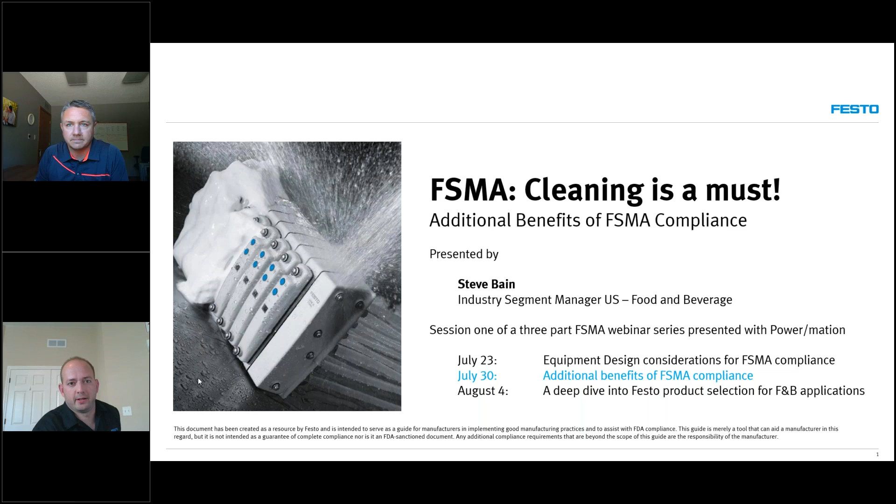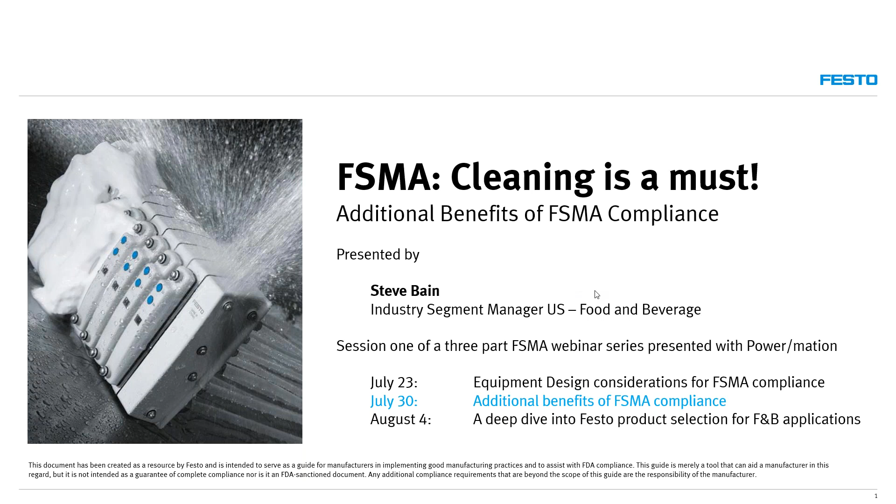All right, thanks a lot. I'll jump right into it. So this is part 2 of a 3-part series on FSMA. Last week we reviewed what FSMA is and what it means for equipment design. We'll review that very briefly, and then we'll talk about what additional benefits can come from compliance.

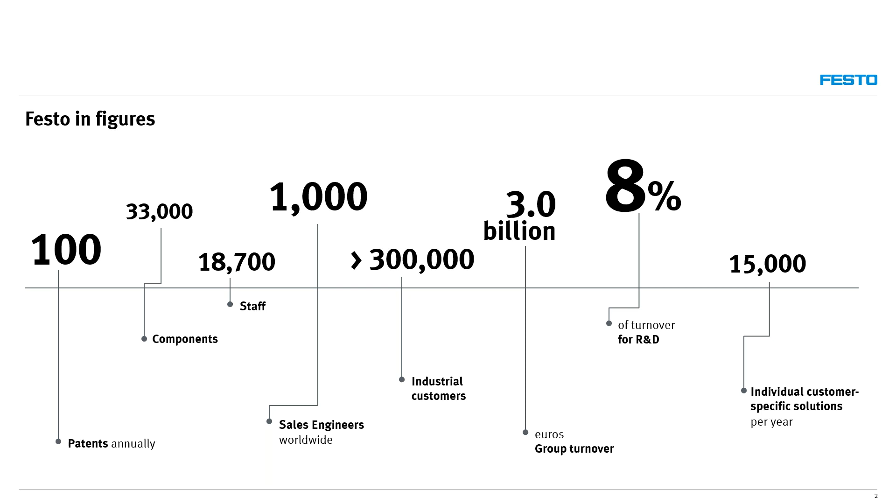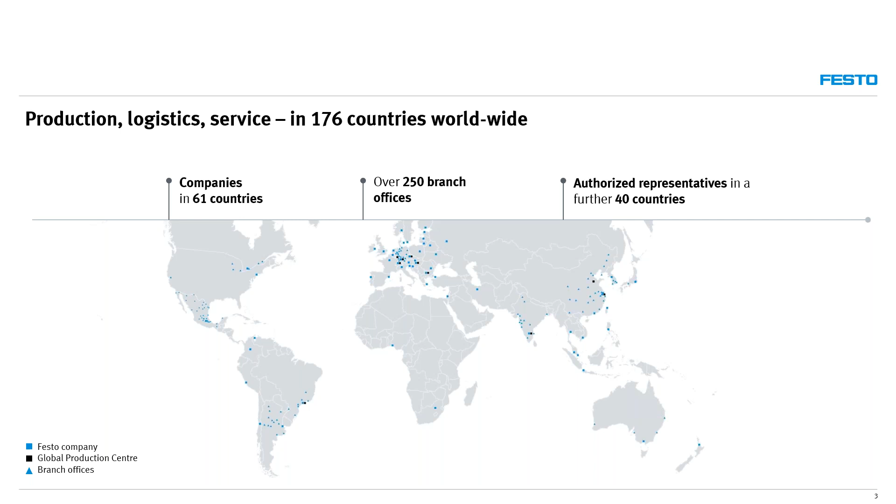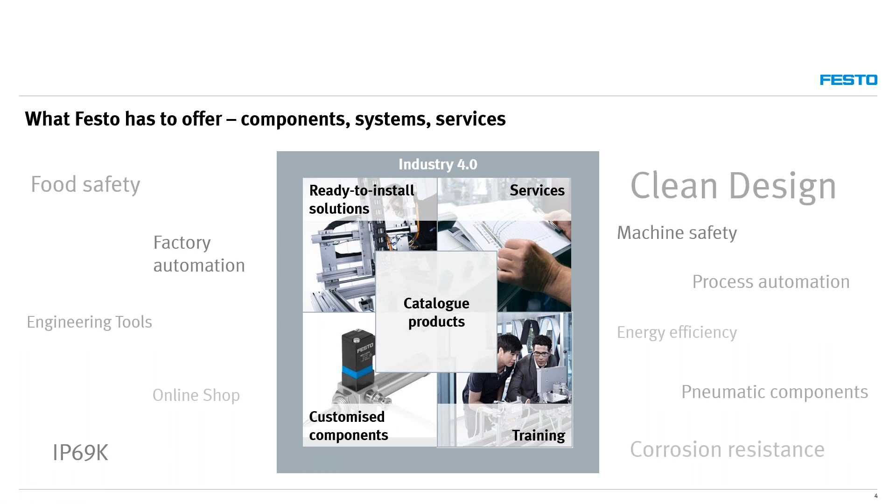So a real quick overview of Festo: we are a 3 billion euro company headquartered in Europe, in Germany. We are also the world's largest supplier of pneumatics for the food and beverage industry, so we see a lot of applications and work with a lot of customers. We've really become an expert in this field of helping steer customers towards better compliance and better equipment design. You probably know Festo for our catalog products, but we also do a lot of customizations. We're the world's largest industrial training company, and we can do services like energy audits or equipment audits. As I mentioned, we also do a lot of customized components, which is especially important for the food industry, where there are so many different applications and custom needs for different equipment.

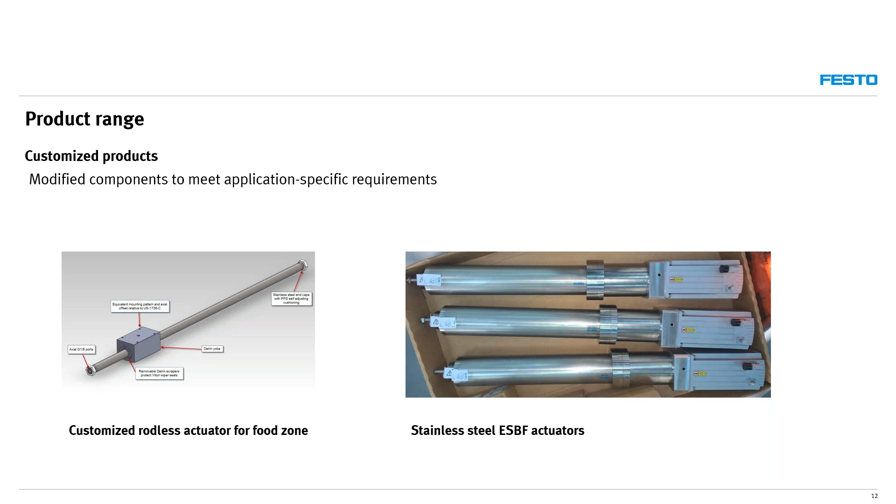So as I mentioned, we'll do a real quick review of what FSMA is. FSMA is the Food Safety Modernization Act. It was signed into law in 2011, and it was the first major overhaul of good manufacturing practices, or GMPs, in 25 years at the time. During that time, the supply chain changed a lot, automation changed a lot, and so there was a huge need for a big change in how we look at the food supply chain.

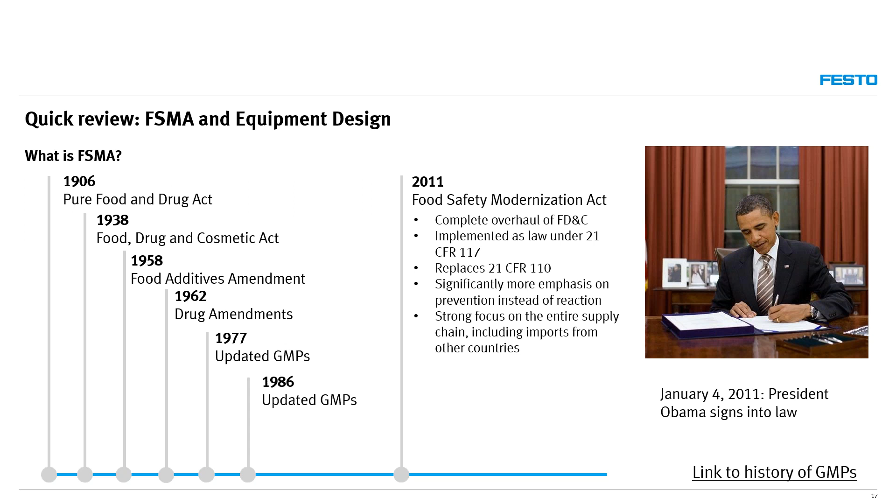The major themes for FSMA were import safety. We're importing about 15% of our food, and how do you know that the facility that food is being produced in is as clean as it is in the US? Well, now FSMA has to be, and a big part of that is being able to rely on third-party certification companies that can go in, certify that it meets the requirements, and now importers can rely on that. We're seeing that heavily starting to roll out through the actual supply chain, where major grocery store chains are only allowing product on their shelves that is from a facility that is certified.

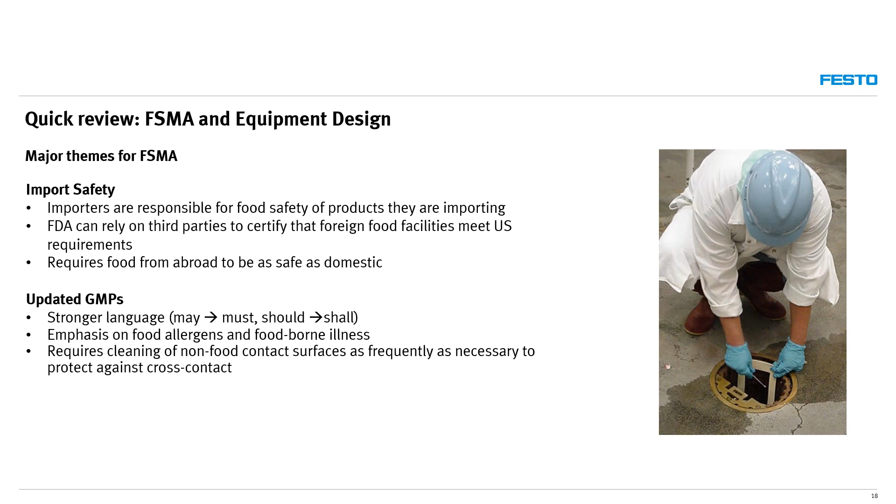Another major update was updating the GMPs. So stronger language, should into shall, so it seems less optional. And then additional language about cross-contact and food allergens. Those weren't part of the CGMPs before because there really wasn't a focus.

FSMA went from reaction to prevention. And one of the big changes too is this hazard analysis and risk-based preventative controls, HARPC. So every plant has to evaluate their hazards, identify and implement preventative controls, monitor those controls, and then maintain records and conduct verification activities to ensure those controls are in place. And this is a big deal for factories to have to implement this process.

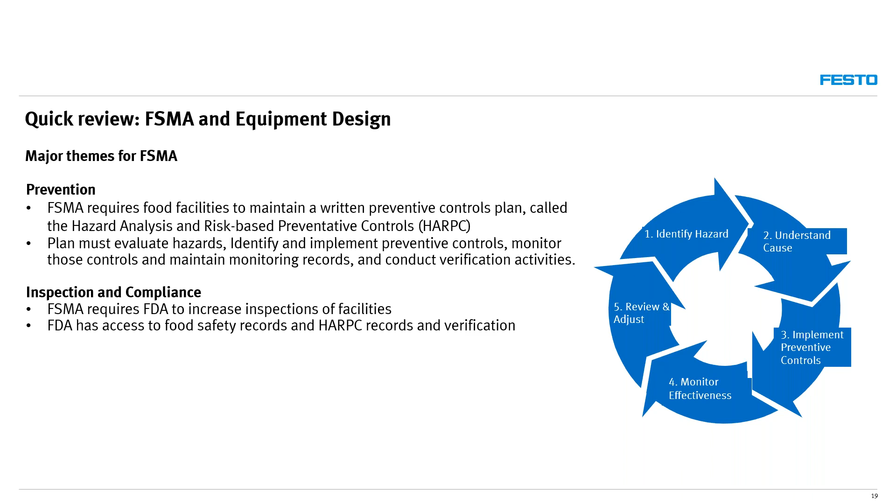And on top of that, the FDA can now have mandatory inspections of facilities, and the FDA will have access to all those records that you're supposed to be keeping about your HARPC verification activities. So this documentation and this prevention aspect of FSMA is really quite powerful.

With that too, the FDA can now enforce mandatory recalls, and they can do that when there is a reasonable probability that the food is adulterated. And they define adulteration as where food has been prepared, packed, or held under unsanitary conditions, where it may have become contaminated with filth, or it may have been rendered injurious to health. And so that language really opens up the possibility that a mandatory recall could be enforced just due to unsanitary conditions of the factory, even if the food isn't contaminated.

And then on top of all that, there's something called the Park doctrine, where executives of companies can be held accountable for food safety issues, even if they weren't aware that the specific offense was even happening. So ignorance isn't even an excuse within a food company.

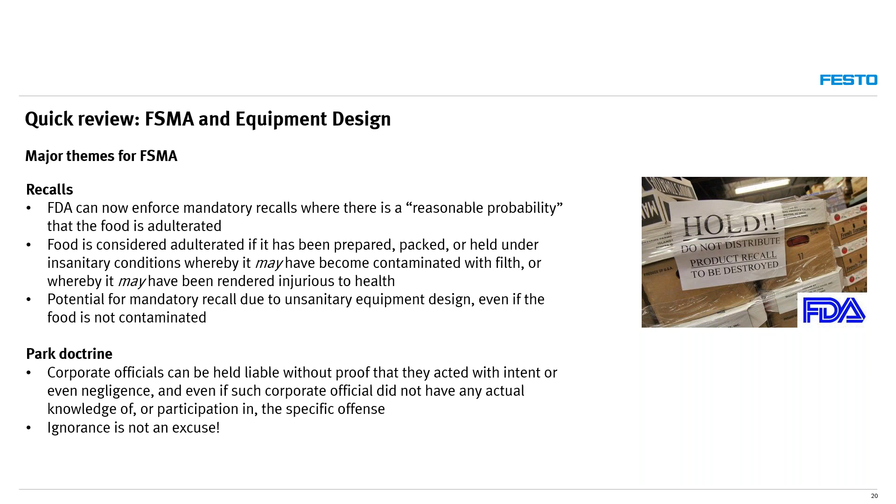So we did a deep dive into Title 21, Part 117, which is where the majority of FSMA lies. And the 117.40 specifically is equipment and utensils. And we did a real deep dive into each one of these laws. We're not going to go through them today. If you want to learn about this, we'll be hosting the previous webinar on the Festo web blog, so you can watch that video.

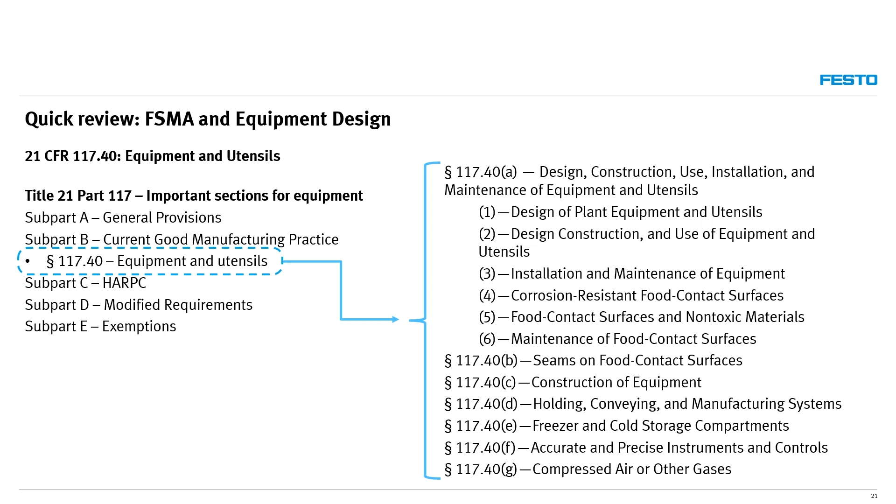But the main takeaways were that machinery needs to be designed to be cleanable. It's not just enough to actually clean it. The machinery itself has to have that design principle built into it. Food contact surfaces cannot have cracks or crevices or introduce contaminants. Machinery needs to be capable of withstanding cleaning processes. Even machinery that does not contact food needs to be capable of being cleaned. And at a minimum, a 0.1 micron filter at point of use should be utilized for compressed air with direct food contact.

From that, we had just kind of broad strokes, from a Festo perspective, what are some things you can do? One is to use components with reduced cracks and crevices. Use components with FDA-approved polymers for seals. Use components with NSF-H1 grease, especially over the food zone. And then standardize on M threads and G threads, which are parallel threads, so to eliminate that crack and crevice created by a tapered thread.

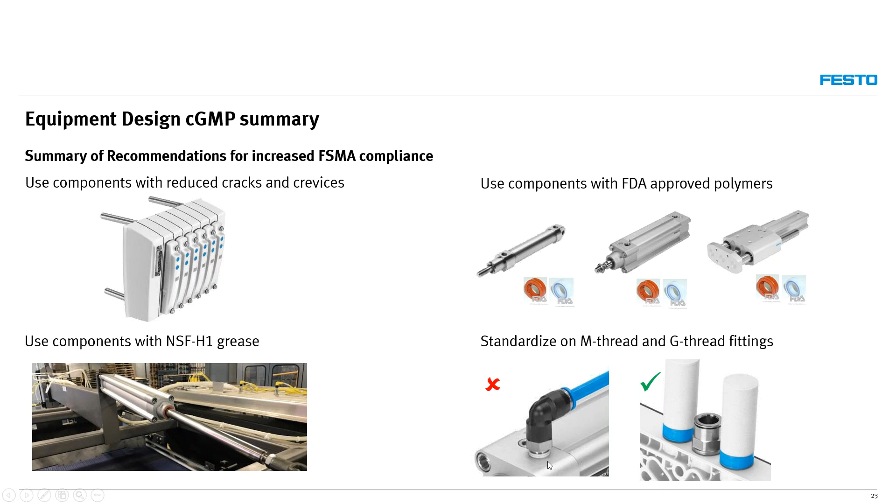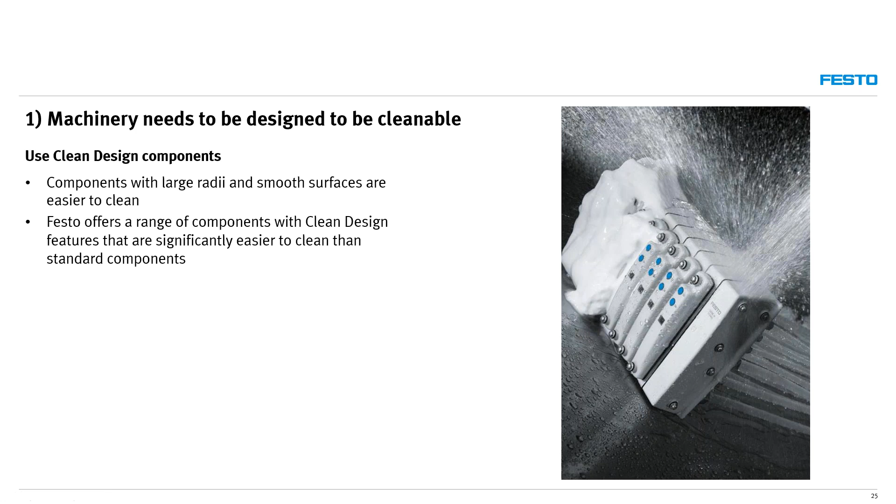But what additional benefits can come from that? So as an example, we said to use clean design components. These components have large radii, smooth surfaces, easy to clean, yes, and being compliant, but a huge additional benefit here is that if you can clean your machine better and faster, in theory, you can reduce the amount of time that you're cleaning significantly. And if you have better cleanability, that means faster cleaning, which means you can run your machine more, which means your OEE, or your overall equipment effectiveness, can increase because your machine has higher availability. This is probably one of the biggest benefits of focusing on cleanability from a profitability standpoint. If you can cut your cleaning time down, your machine operation time can go up.

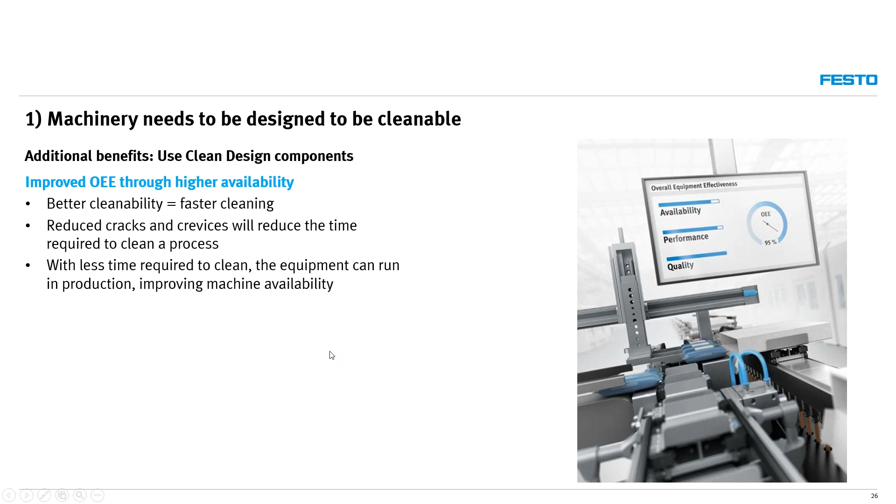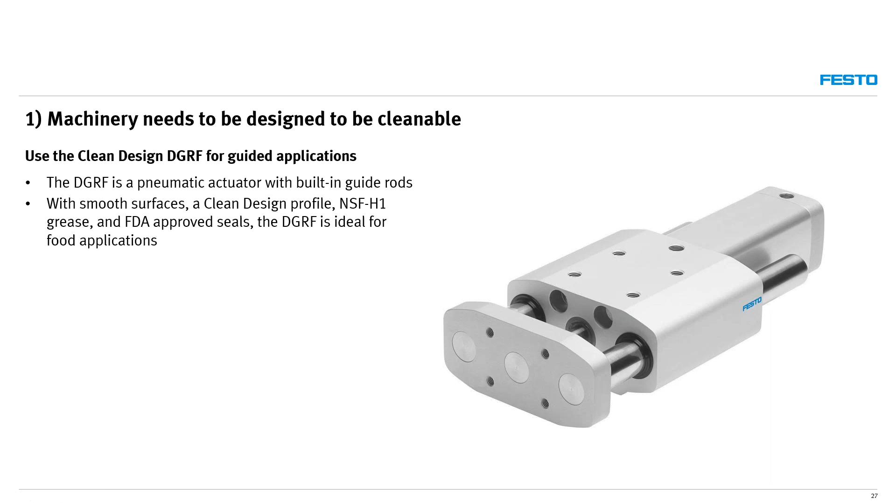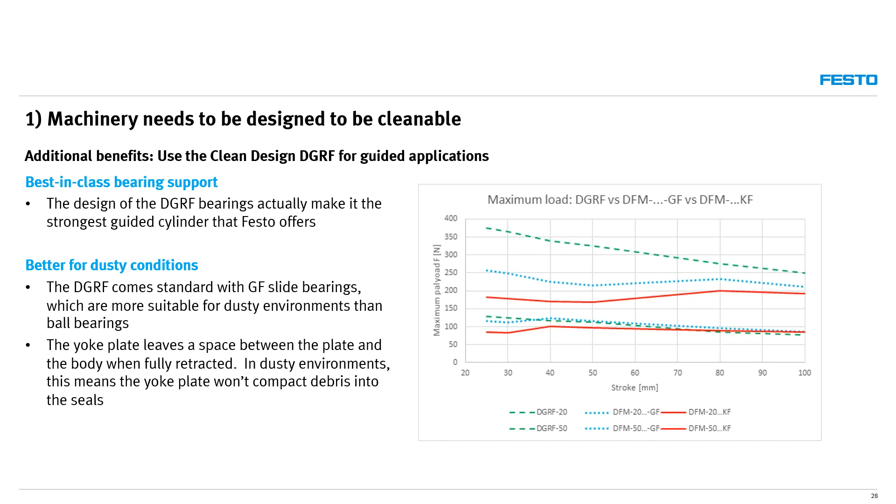Another example might be using the Clean Design DGRF. So this is one of our Clean Design actuators, food safe grease, food safe seals, but it's also the strongest Festo actuator for a guided cylinder, extreme bearing strength, just due to the design. So if you're looking at even a non-wash down application, but looking for strong bearing support, it's a great actuator for that. It's also one of the better actuators we have for dusty conditions. So it comes with slide bearings, which are better than ball bearings for dusty environments. But then an interesting aspect too is that the yoke plate, when it closes all the way down, leaves a space between the plate and the body. And so if there is a lot of dust or debris, it won't compact that into the seals and cause a premature failure.

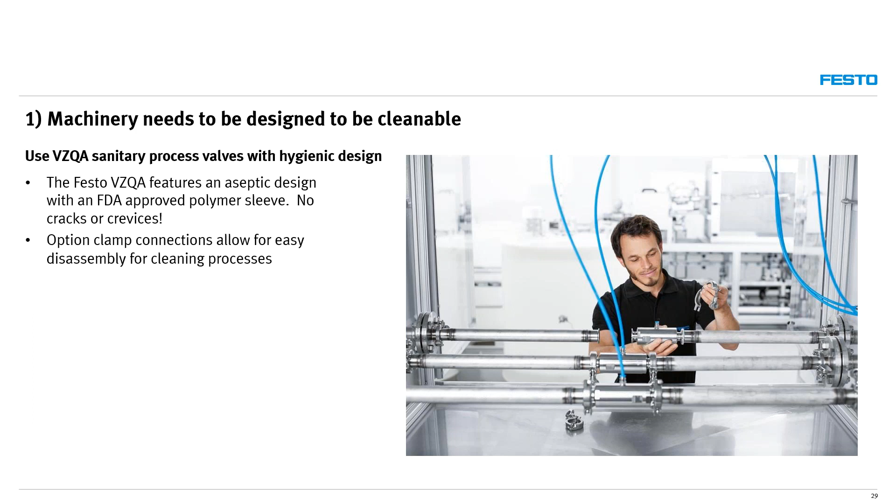Another product we talked about was the VZQA pinch valve. This is an aseptic design with clamp connections so you can easily disassemble it to clean your equipment. Some other benefits are that it's very small, not much bigger than the pipe itself, so you can fit a lot of valves into a very tight space, which might create some opportunities.

Another interesting thing is that it uses a lot less energy than a comparable ball valve or butterfly valve with a quarter turn actuator. I did a quick comparison: a half-inch ball valve consumes about 0.6 liters of air per cycle, while a VZQA is less than 0.1 - so a much smaller footprint.

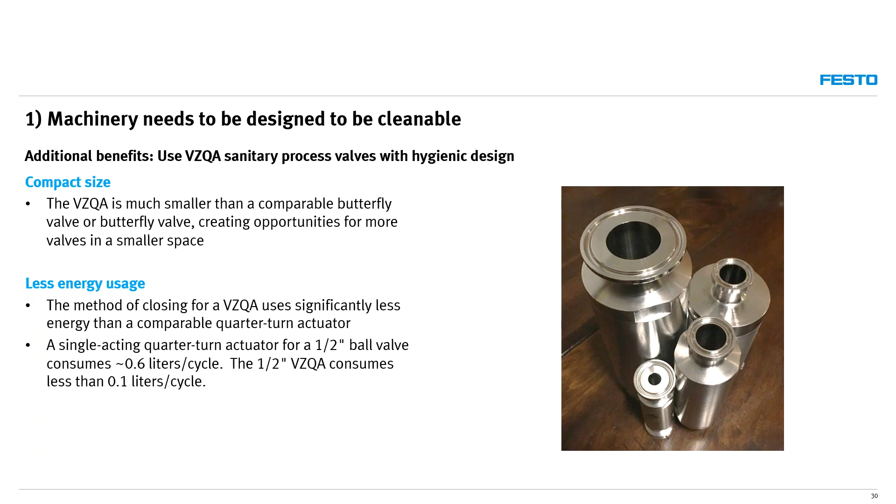Next, food contact surfaces cannot have cracks or crevices or introduce contaminants. We already talked about threads, about how a G thread is more sanitary than a tapered thread. A tapered thread, when you screw it in, also galls the threads, so you could create metal fragments during that process - another potential contaminant. Then you have the sealing tape, which is another potential contaminant. So tapered thread is not very good for food safety.

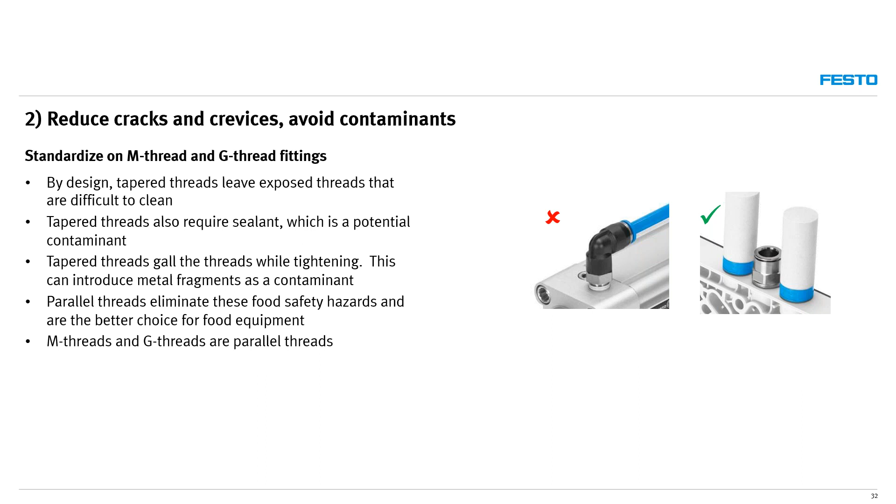But if you go to G thread, there are a lot of benefits. One is that you can screw in and screw out a G thread many times without wearing down the threads or having issues, while a tapered thread can only do this maybe 3 or 4 times. So if you have to replace an actuator, maybe now you don't also have to replace a fitting - that's a big benefit.

Energy savings too. Tapered threads are very difficult to get a bubble tight seal. When you screw in a tapered thread, you end up creating a small air channel that spirals up through the threads, so unless your sealing is perfect, you're going to have a leak. With a parallel thread, you eliminate that because everything gets sealed properly with the shoulder seal.

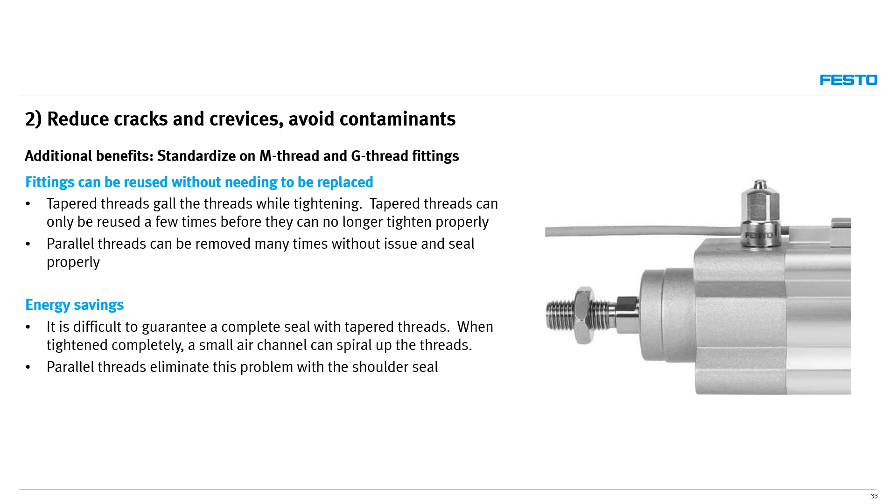Also, from an engineering perspective, when you have a tapered thread and you're screwing it in, the height of that thread is really kind of uncertain. So if you're looking at a tight tolerance application, it's hard for the engineer to verify whether this is going to fit or not. Where with a G thread, you know exactly how deep that's going to be, and you can verify it's going to fit.

And then last, with a tapered thread, it's pretty easy to over torque or under torque - it's hard to get that torque range right. With a parallel thread, it's very hard to over torque. So from an installation standpoint, again, parallel threads are a better option.

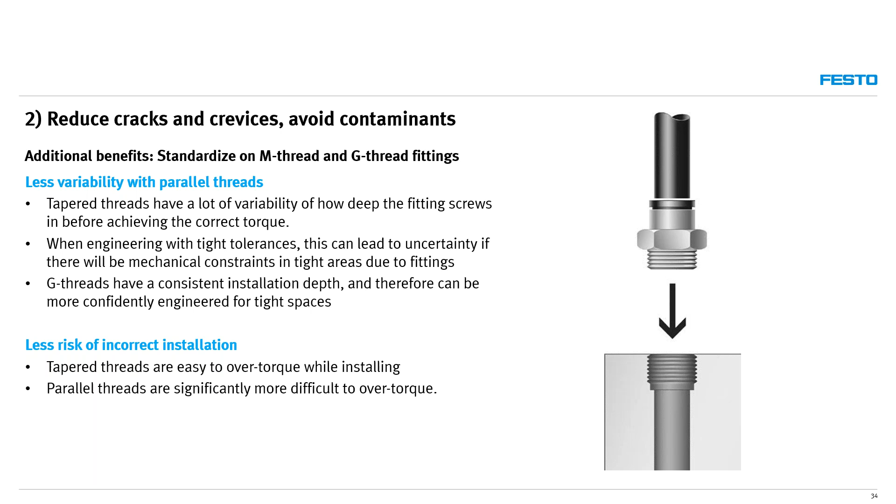Also recommend the use of NSF grease, especially over the food zone. A lot of pneumatic and electromechanical components come with factory installed grease. Where possible in food, that should probably be NSF H1.

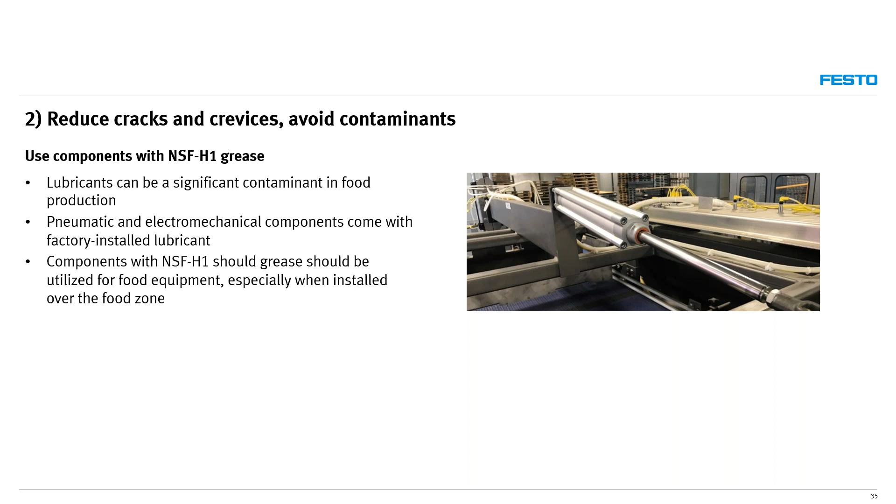But what benefits would standardizing on that bring? Well, the first thing is good news: you don't get negative aspects to that. Thorough testing from Festo - we have what we call our torture lab, where we put all of our actuators and valves through rigorous tests, and NSF grease does not hurt our performance. So if you're using components with NSF grease, you're going to get the same or better performance as a standard Festo cylinder.

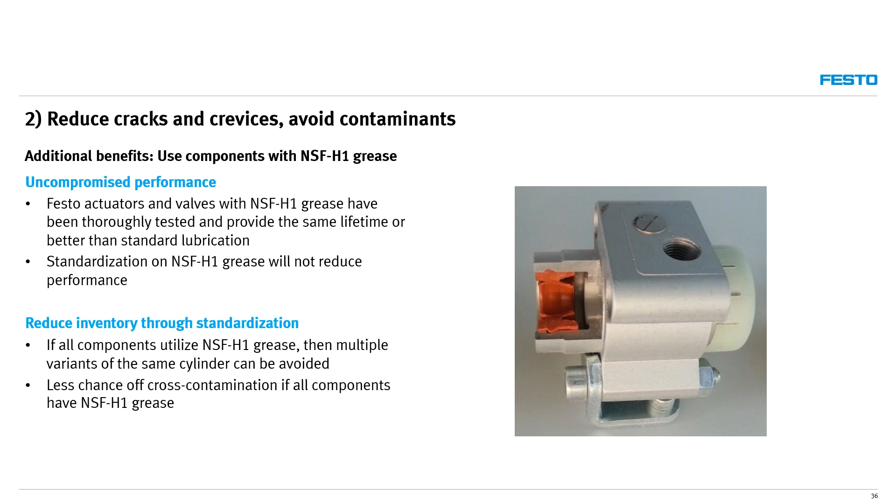It also helps reduce your inventory. Instead of having one cylinder with NSF grease because it's over the food zone, and another one that isn't, you can consolidate your inventory into a single cylinder. And you have less risk of someone accidentally choosing the wrong cylinder and putting it over the food zone. So if you're going to standardize it, there's not a lot of downside to that.

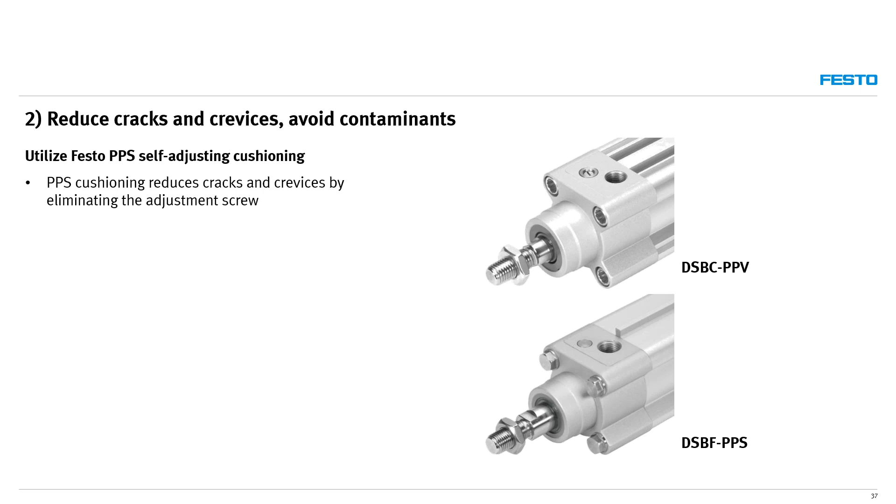We talked about how using Festo self-adjusting cushioning, which is PPS, eliminates the adjustment screw for adjusting the air cushion.

There's a lot of additional benefits that PPS has, though. A big one is that PPS cushioning adapts to changing conditions. If you have a PPV adjustable cushion, you set it for a given application - the proper cushioning for that air pressure, flow control, pushing a certain load with a given amount of humidity in the air and friction on the rod. You might optimize it, but over months or years those wear characteristics change, and PPS cushioning adapts to that. Your cushioning will be good now and in the future. That's a huge benefit.

And you get that benefit at a reduced cost because there's less mechanical parts. Our cost for that part is reduced by about 1 or 2%. So you can buy these cylinders for less expensive than adjustable cushioning.

Another big benefit is faster installation. Instead of having to install a cylinder, go to the manual overrides on the valve, toggle it, see how it reacts, go adjust the cushioning, go back and forth - you completely eliminate that step. Whether you're installing a machine for the first time and have to set cushioning on 20 cylinders, or you're an end user replacing a cylinder between production runs, in either case you're eliminating a lot of time, potentially not even needing 2 people to do that process - that could be a really big deal.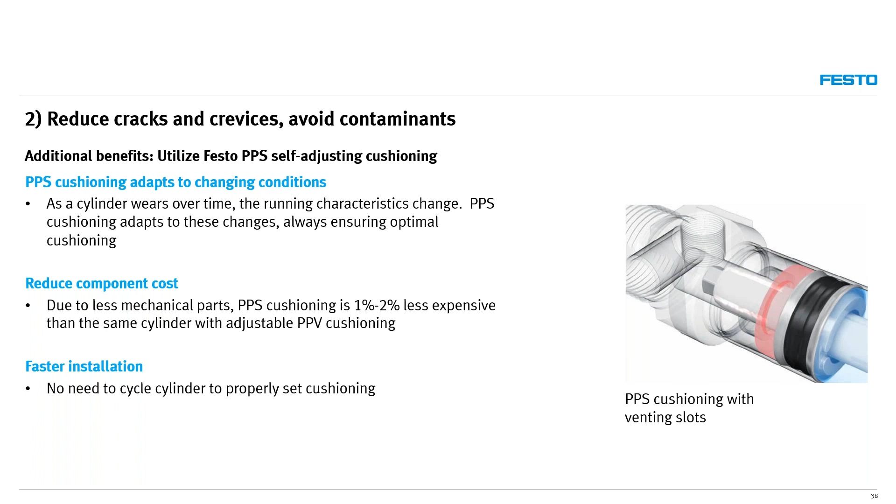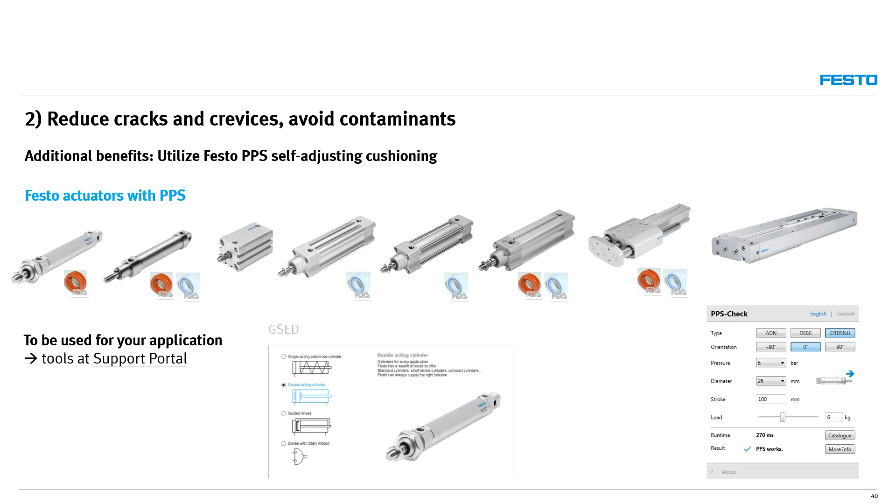Next, this is the slide showing all of the different Festo cylinders with PPS actuators, and also highlighted which ones have those FDA approved seals.

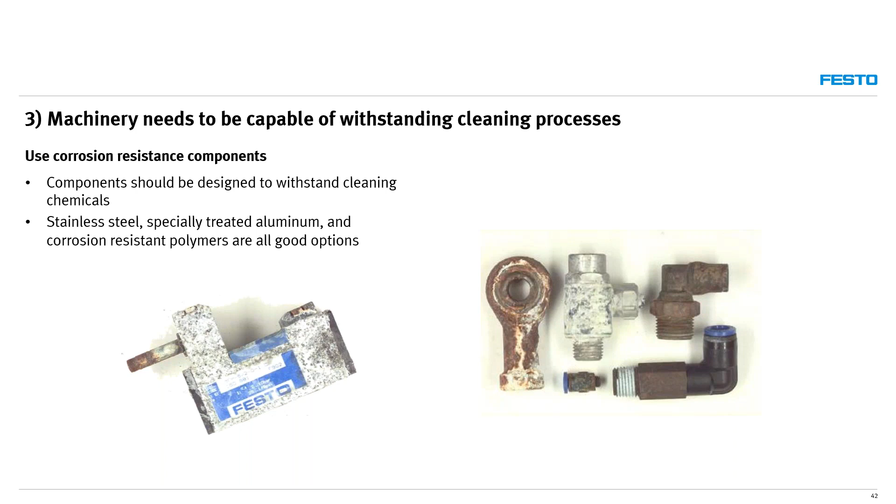So the third key idea was that machinery needs to be capable of withstanding cleaning processes. The recommendation is to use corrosion resistant components where you can. That seems obvious in food, but even in non-food applications, things get oxidized over time - general rust happens. Corrosion resistant components will give you longer life in general. Most, I think all, of our corrosion resistant components also incorporate NSF-H1 grease and FDA approved seals, so there's built-in compliance. Using corrosion resistant components tends to get you more into the food spectrum of components, meaning you're probably more compliant - you should always double check that, but it's a good way to go.

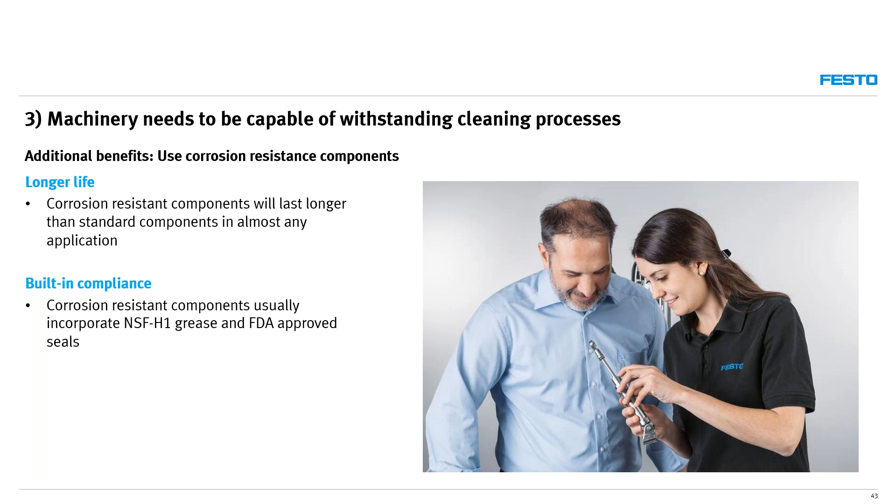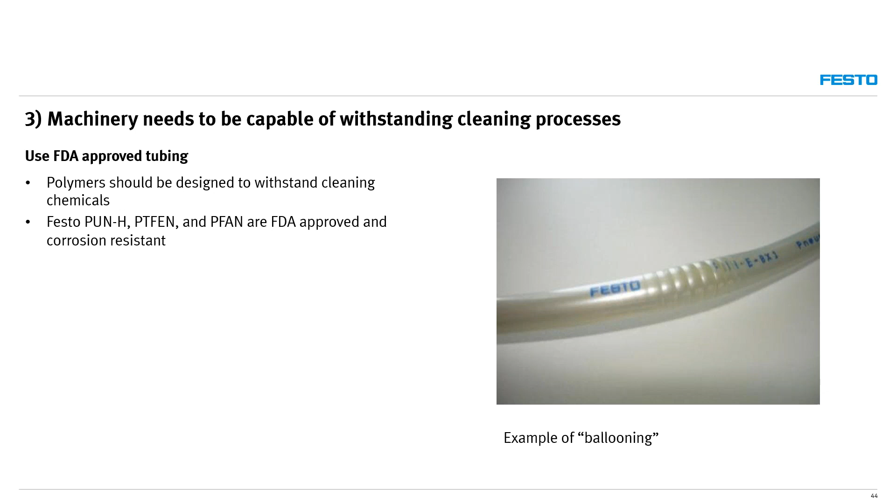Another recommendation was to use FDA approved tubing. If tubing is FDA approved, it means the polymer it's made with falls under the generally recognized as safe list from the government. There are all these polymers, and the polymers used for these are FDA approved. We have 3 tubes that are FDA approved at Festo: one is PUN-H, one is PTFE-N, and the other is PFA-N.

So what additional benefits come with using those tubings? Well, all 3 of them are also hydrolysis resistant, so even if it's not a food environment, they won't deteriorate due to wet or humid environments where water can interact with the tubing material and break it down. PTFE-N and PUN-H, if the PUN-H is black or blue, also has high UV resistance, so you can use these in outdoor applications.

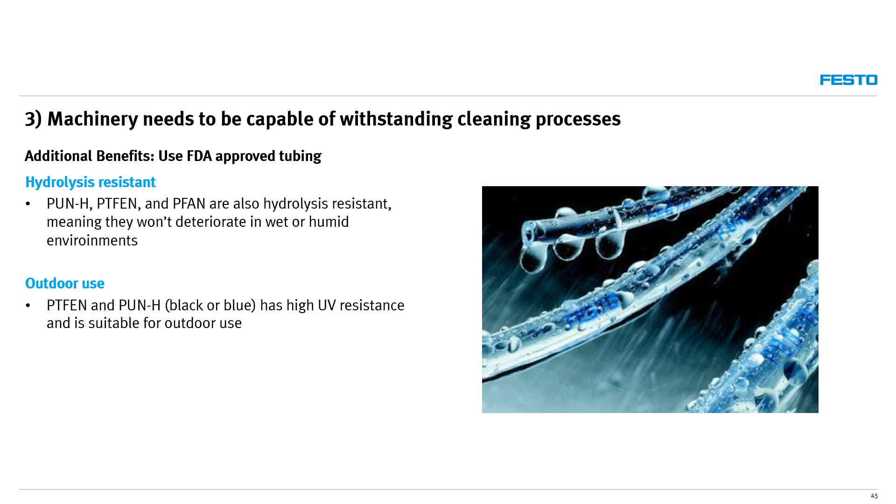PUN-H itself is a great all-around tubing - very flexible, low cost. It's my go-to if I'm going to look at a new application.

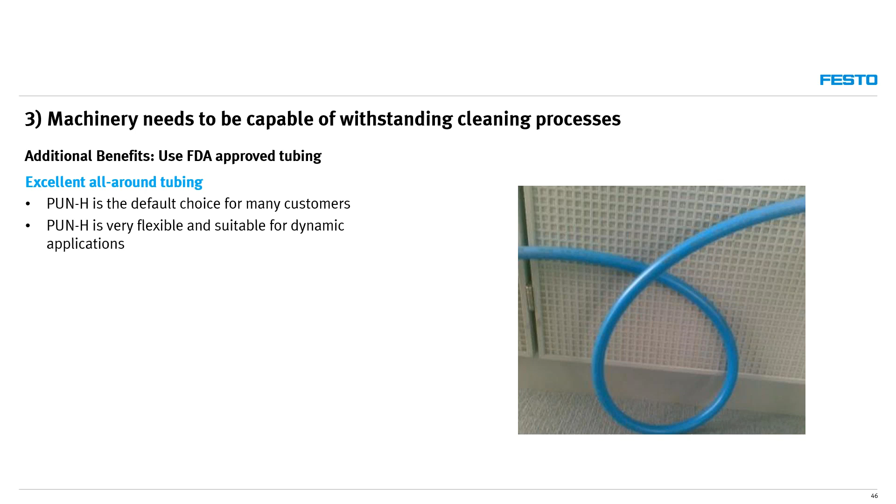PTFE-N and PFA-N are both good for high pressure and high temperature. Maybe you're putting something next to an oven and you're not sure what that heat radiation looks like - this kind of takes away that risk. And if you're in an application looking for EC 1935/2004 certification, which is a growing requirement in Europe for food applications, our PFA-N tubing is 1935/2004 certified. So we can fulfill that need if it's required.

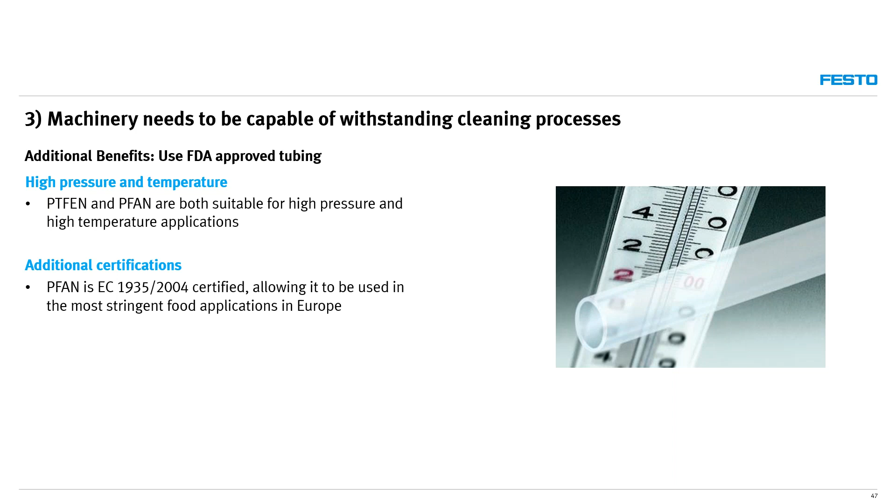Another recommendation for withstanding cleaning processes is just higher IP ratings. The Festo MPA-C is IP69K rated, meaning it can withstand high pressure washdown. It does that through 2 really cool design features. One is the seals themselves - when assembled, if you were to spray it with high pressure, it actually helps enforce the seal even more. So the design of the seal helps make it even better in high pressure washdown situations.

And then we also have a redundant seal. Your outer seal is the one that reacts to the pressure. The inner seal also helps protect the electronics. So even if that outer seal was to get breached, the inner seal is still going to protect the electronics. To my knowledge, we haven't had a field failure yet of this product, so that's a really good, awesome product from a washdown perspective.

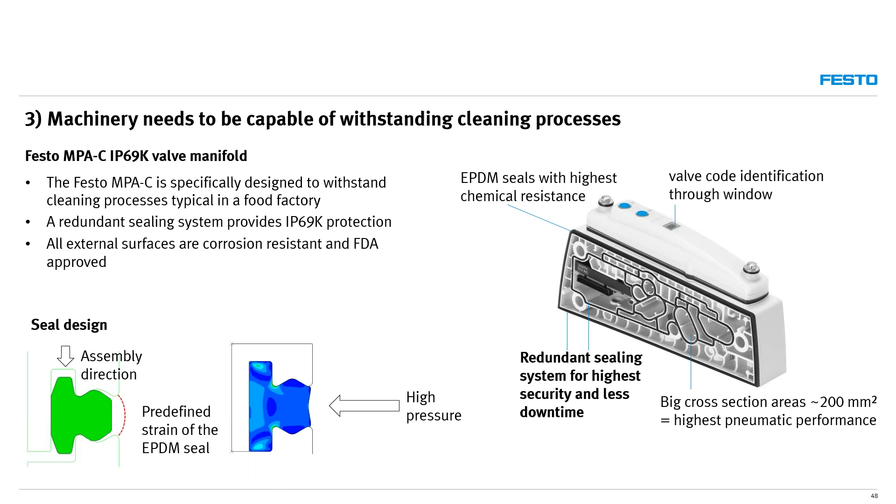But what are some other benefits that come with this? First is that your control cabinet size could go down or be completely eliminated. In the example shown here, this is a brewery - they wanted a valve manifold in the cabinet, nothing else. The MPA-C compared to a valve manifold in the cabinet was less than half the cost. So this was a great cost saving in addition to also being very well suited for this environment.

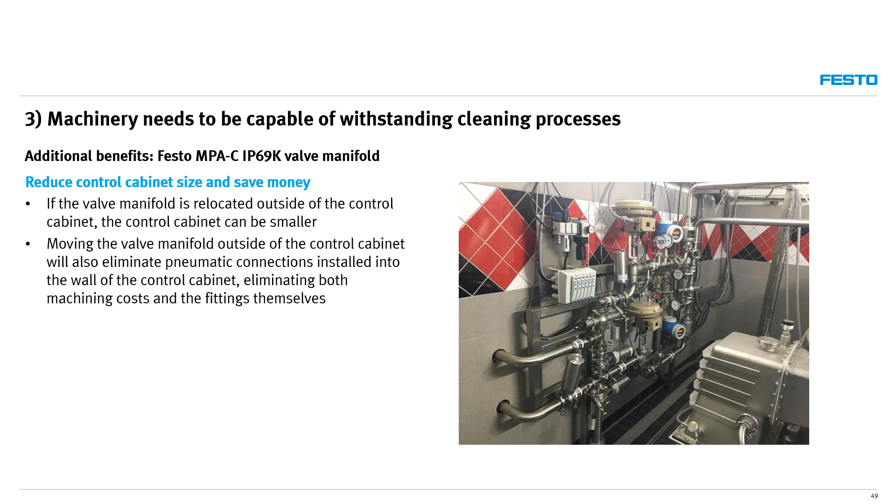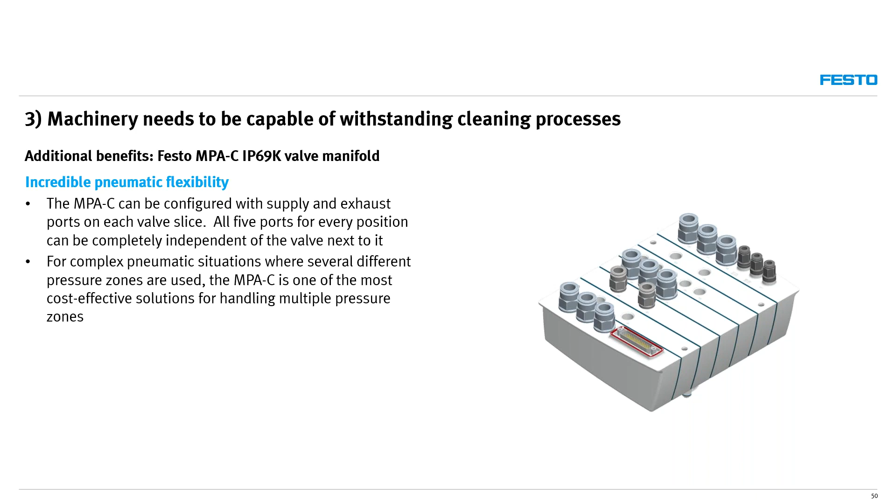The MPA-C also has incredible pneumatic flexibility. Of every valve manifold Festo has, this has the most flexible pneumatic capabilities. You can configure every valve slice to have 5 ports, and every one of those 5 ports can be completely independent of the valve next to it, meaning you could run one valve forward, one valve backwards, have a bunch of different pressure zones. So if you have an application with a lot of pressure zones or just a lot of complexity, the MPA-C might end up being the most compact or cost-effective solution we have.

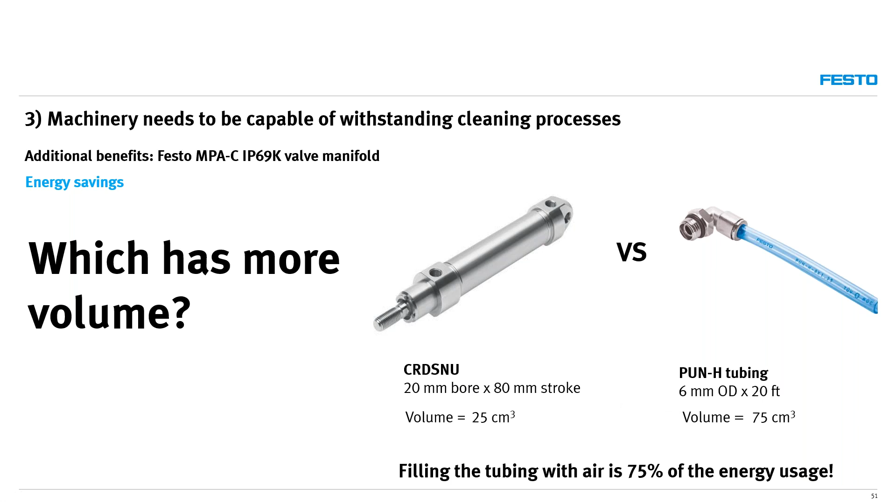On energy savings, here's a quick application question: which one of these has more volume? A CRDSNU with a 20 millimeter bore, 80 millimeter stroke, moving in one direction has a volume of 25 cubic centimeters. PUN-H tubing, 6mm OD, 20 feet long — not that long of a run compared to a lot of things we see — what's that volume? 75 cubic centimeters. So in this application, filling the tubing with air is 75% of the energy usage. That's astonishing for a lot of people.

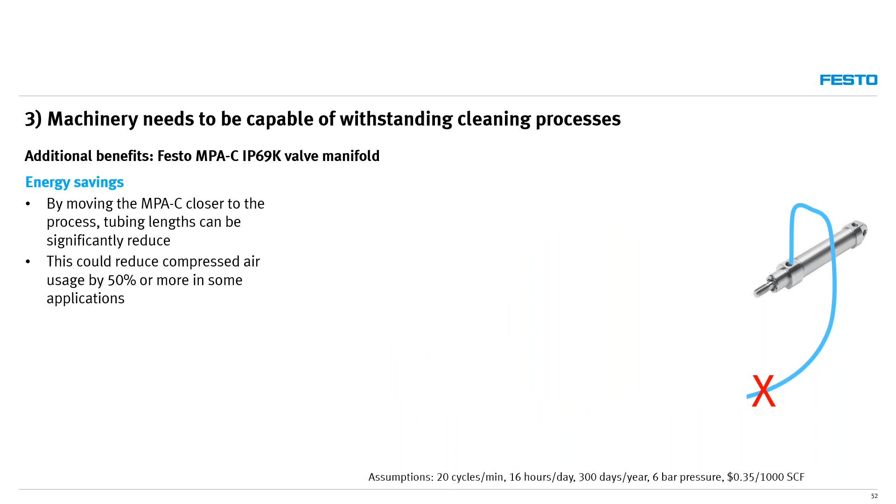But what if you were to use MPA-C? So you've got this long run of tubing from a cabinet, but if you clip that and put an MPA-C in, you've gone — hypothetically — from 20 feet of tubing down to 6 feet. Your energy cost on an annual basis, with some assumptions, drops from $85 down to $41. So over 50% energy savings just by being able to move your valves closer to the process. That's a really big deal for some customers and applications, especially if you can incorporate this from the design perspective. $85 to $40 of savings alone might not justify doing this, but if you build it into your specifications from the get-go, you can save a lot of energy.

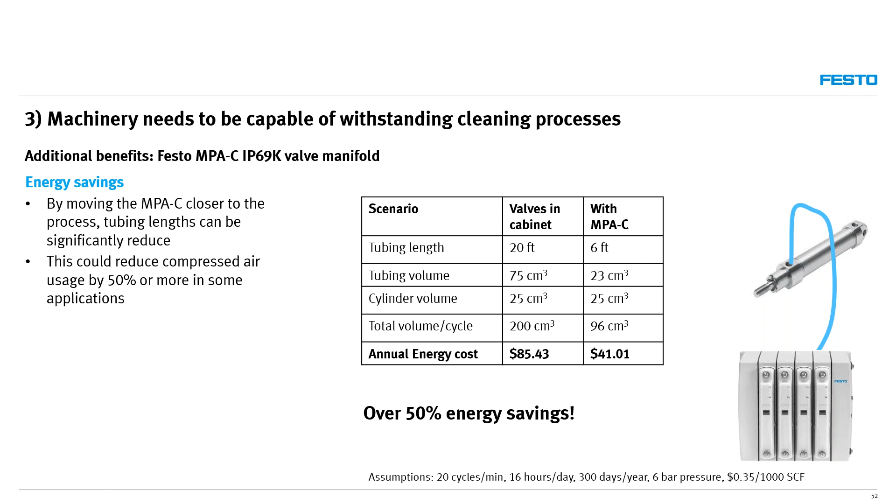An additional benefit of moving your valves closer to the process is that your reaction time becomes a lot more consistent. So if you have applications like rotary fillers, filling operations, sorting applications, or reject applications, the MPA-C can provide more consistent timing because that tubing length is shorter. And with shorter tubing length, your cycle time can be faster. For some applications, you might actually be able to ramp up your production speed just because your valves are closer to your process.

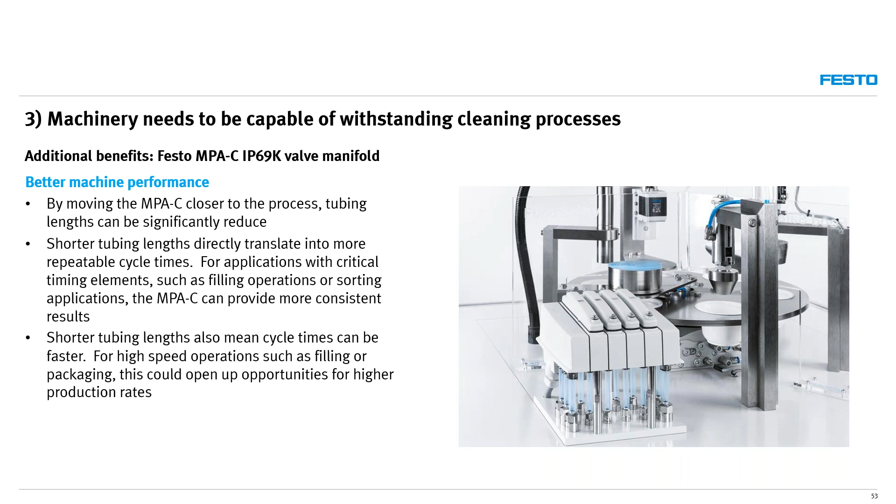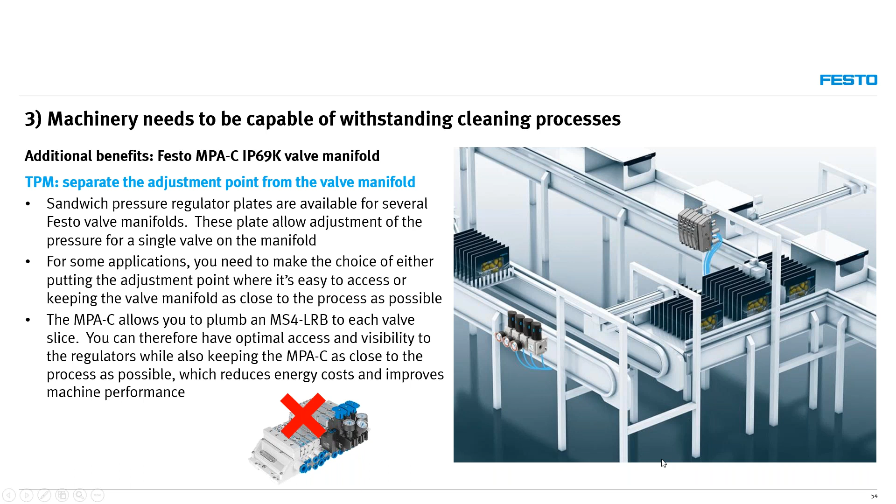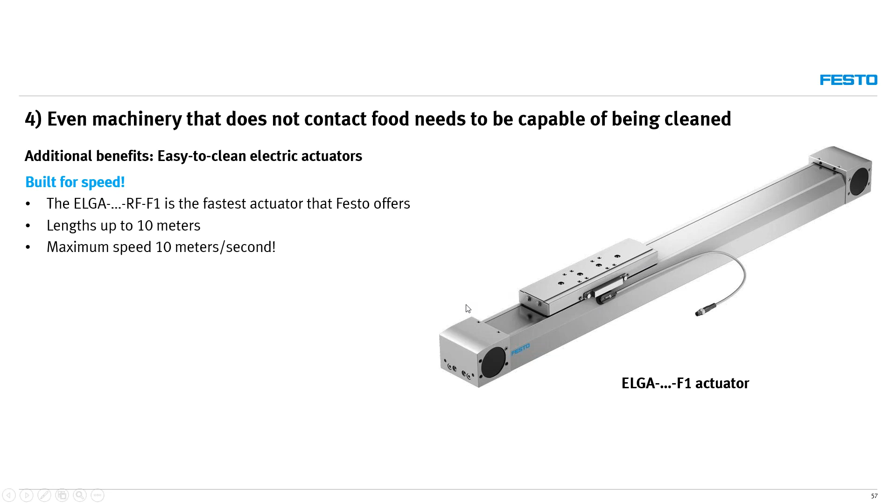In addition, if you're going to use the ELGA, one of the coolest things is that it's actually the fastest actuator we offer if you get the RF roller version. We can make this in lengths up to 10 meters long, and the RF version has a maximum speed of 10 meters a second, which is just flying. So if you use these products, you might be able to have your machine built to be faster.

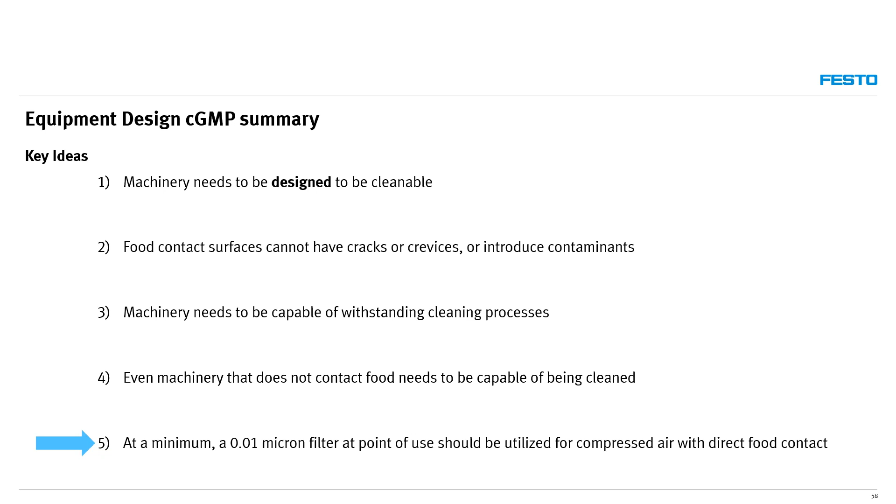At a minimum, a 0.01 micron filter at point of use should be utilized for compressed air with direct food contact. That's not actually written into the law, but as you're looking for trusted air quality specifications, SQF, one of the third-party certification companies, recommends in their guidance documents a minimum of a 0.01 micron filter located at point of use. So if I was responsible for specifying compressed air quality, that might be something I lean on.

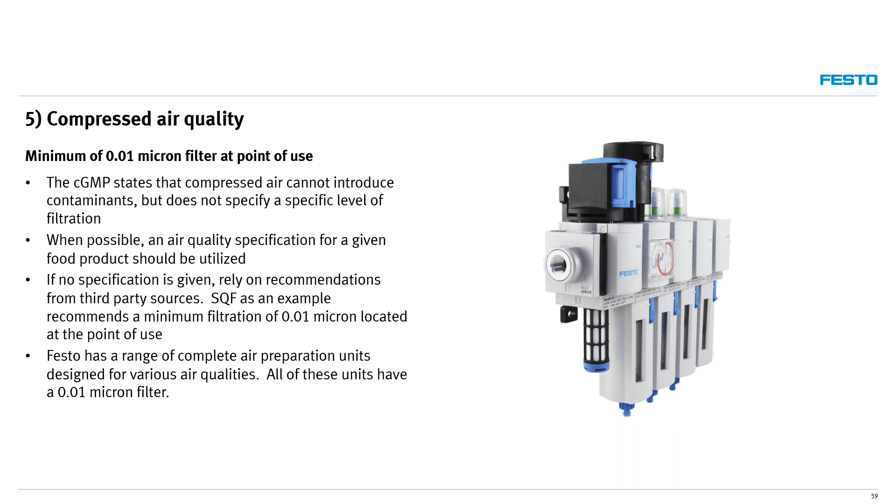Festo's created a range of complete air preparation units designed for various air qualities, and all of these have a 0.01 micron filter. So if you're trying to be compliant and meet various air quality classes, you can just pick an air quality class to determine your flow rate, and now you have a single part number to help meet that air quality requirement.

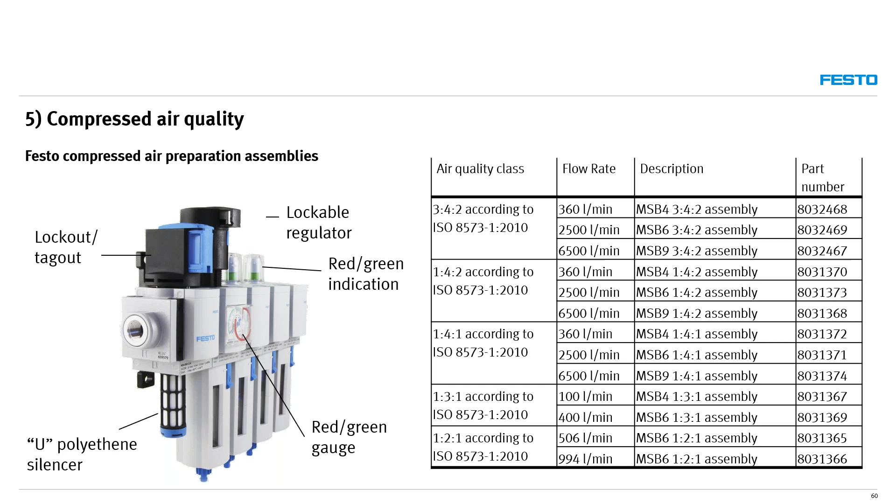These air prep units also have some really cool things. First, because you're providing better air, you'll get longer component life, and you might have reduced overall equipment costs because your valves are getting treated with much better air. With that single part number, you can have easy standardization—either one to try to meet everything, or maybe a couple for different flow rates at a given air quality. These assemblies are in stock in Ohio and available for immediate shipment, so this isn't going to slow you down.

These assemblies also take a lot of TPM considerations into effect. Red-green pressure gauges, as an example, allow an operator to walk by and realize something is wrong. So instead of just calling maintenance and saying the machine's down, they can say the pressure is off, and maybe maintenance can fix that from the maintenance room instead of walking up to the machine. If you'd like to learn more, there's a TPM document in the downloads that highlights Festo solutions for TPM. Another example is the red-green indication on the filter—as differential pressure increases from collecting contaminants, it changes from green to red, so you know it's time to change it.

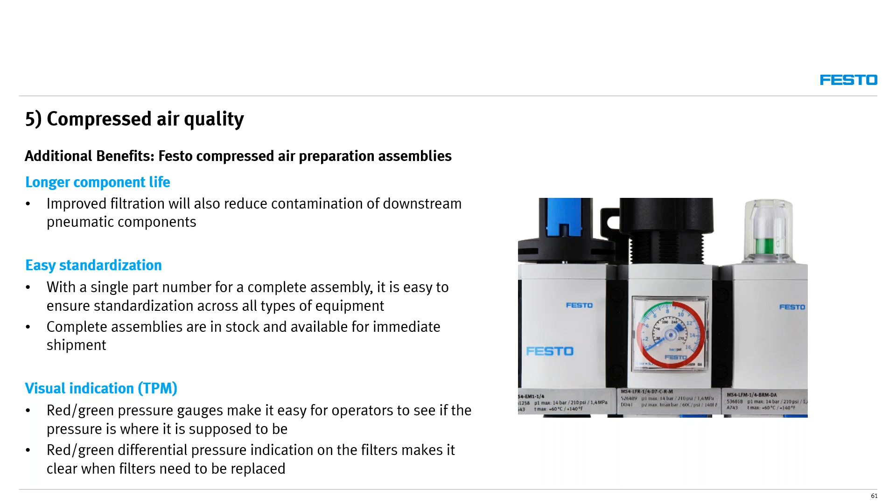These assemblies also include a manual on-off with lockout tagout. This is important for machine safety reasons, but also, I've been in a lot of factories where it's not really clear how to dump the air for a filter. How often do you think that filter gets changed if you can't even reduce the pressure to remove the bowl? So this is a really important part. The regulator also has a lockable slot, so you can put a lock on it, which is great for tamper-proofing, so operators can't come by and just adjust it when they think something needs to be tweaked.

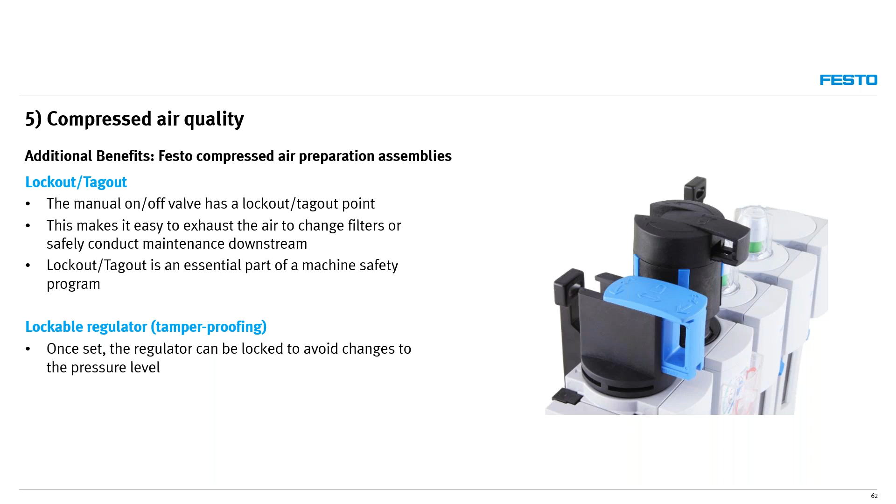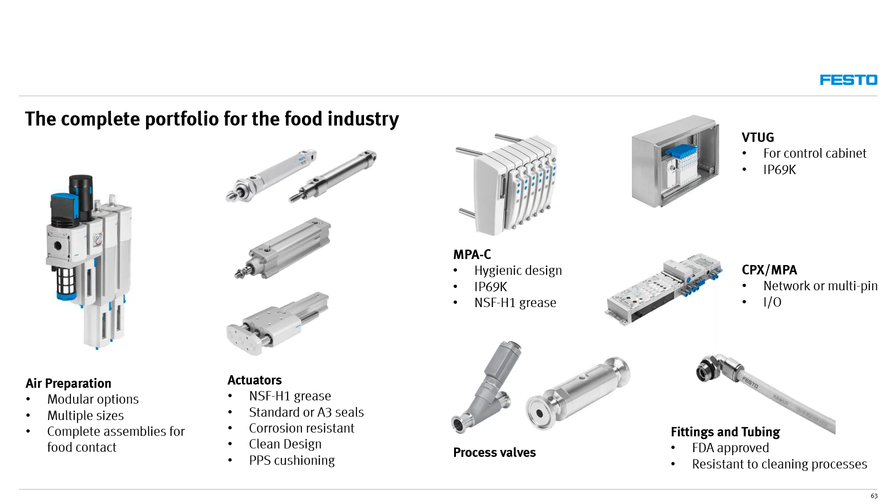Festo has 30,000 products. Also in the support documents is a guide for new products for the food industry. So if you're looking at a new application, a new machine, or maybe retrofitting an old machine, this guide takes that 30,000 products and breaks it down to just the product families we would recommend for a new food application.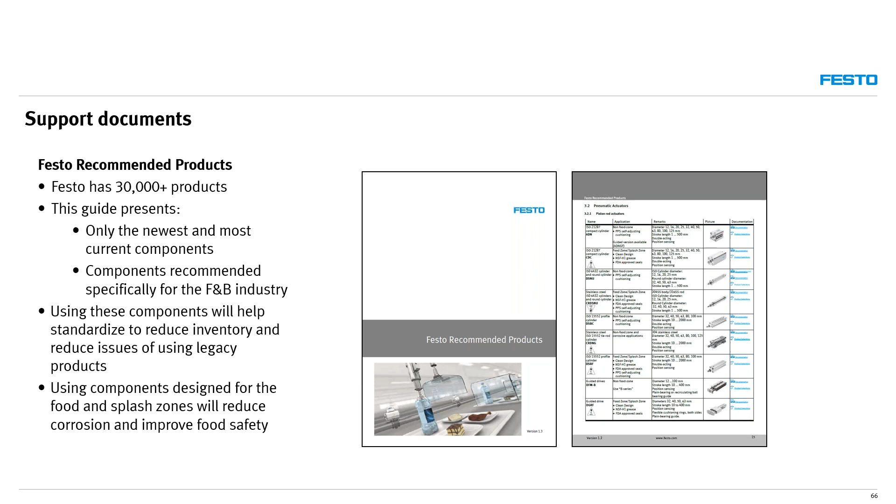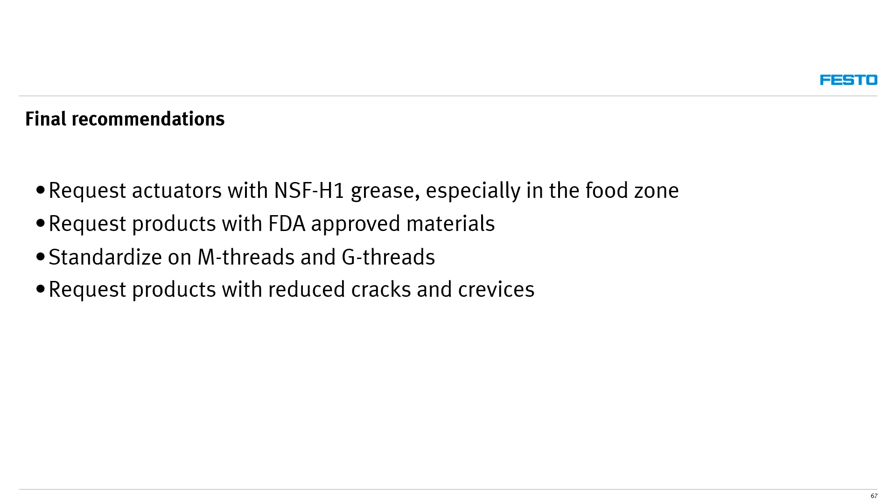So some final recommendations: again, request products with NSF-H1 grease, especially in the food zone. Request products with FDA approved materials. Standardize on M threads and G threads. Request products with reduced cracks and crevices. And request Festo—Festo has the most comprehensive line of pneumatic products for food applications.

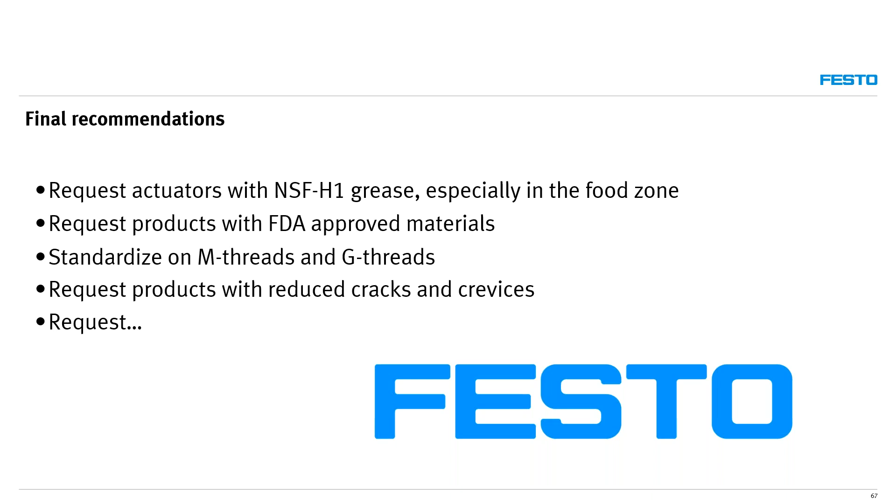Before we get to questions, part 3 will be next Tuesday, August 4th, and this will be a deep dive into the products themselves. So if you want to learn more about, let's say, the DGRF actuator—what options are there, why would I choose that option and when—that is going to be the focus. We're also going to do a deep dive on air quality. So if I have a 40 micron filter versus a 5 versus a 1 micron, what kind of air qualities can I expect with that? We'll walk through that process.